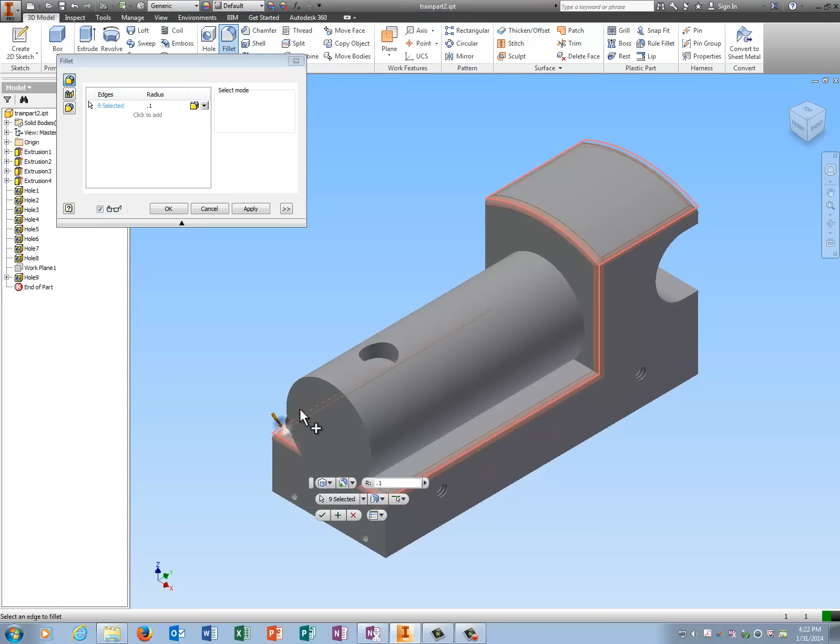So I'm going to just start clicking on all of the edges. And guys, this is like Pokemon, you gotta catch them all. So get this front, get this part here, get these little pieces here.

Where the cylinder touches the bottom. Don't forget this little guy.

Now if you miss one, can you go back and add it? It's just easier to make another fillet, like click on fillet. Get these guys, this little guy.

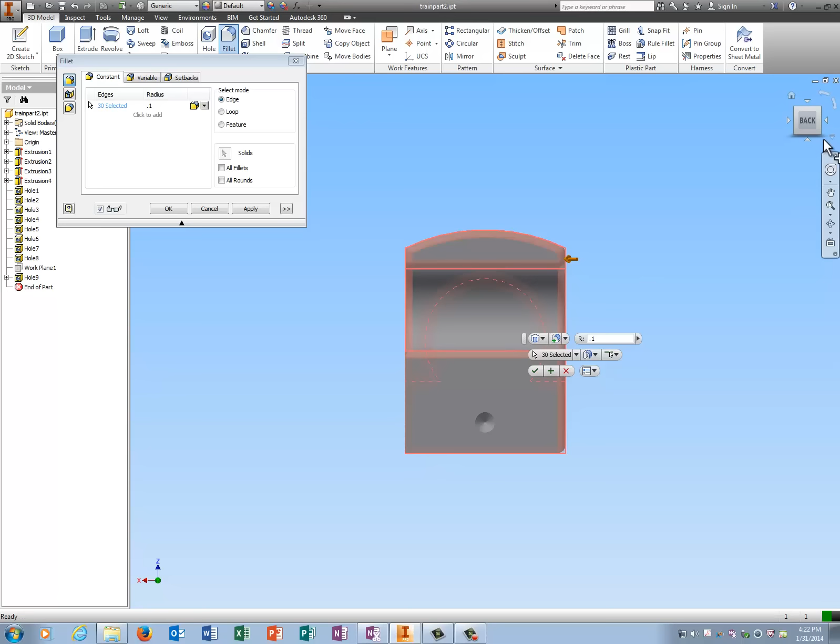Okay, did I get all of those? Making sure I got all of them. Oh, I missed that edge. Okay, that should be them all.

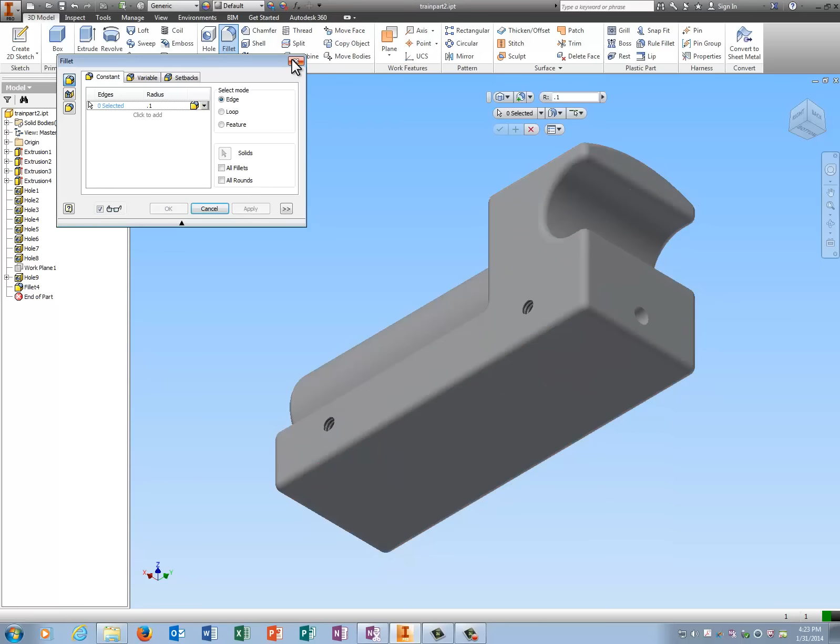So then I hit apply, and now you can see my train is nice and smooth. Give it one more look over. Oh, I missed this guy, so I better go back and add him. Click fillet, click what you need to add, tell it apply.

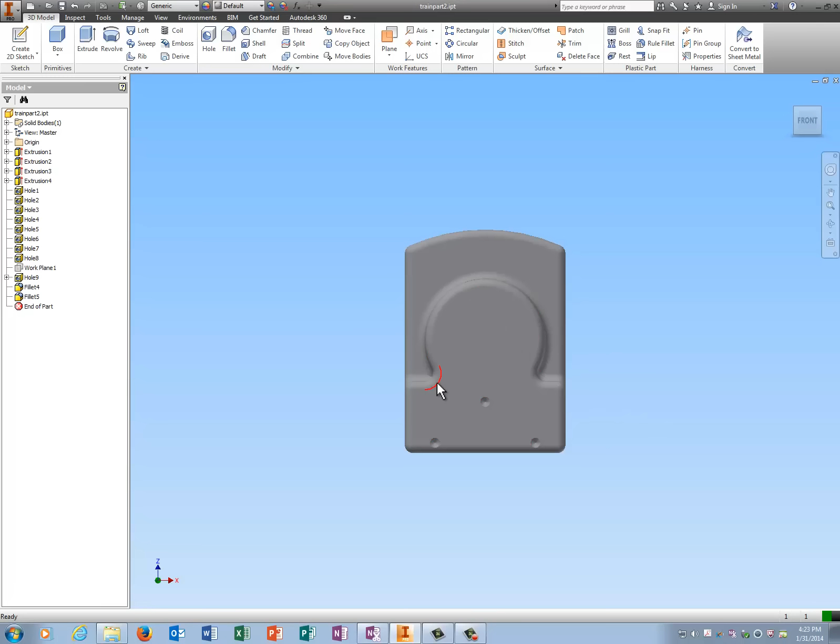Okay, look at the front of your train and make sure this curve bows out. If you selected it in a certain way and it really has no rhyme or reason to it, sometimes it'll bow out this way instead of in, and you'll just need to take the fillet off and go back and fix it.

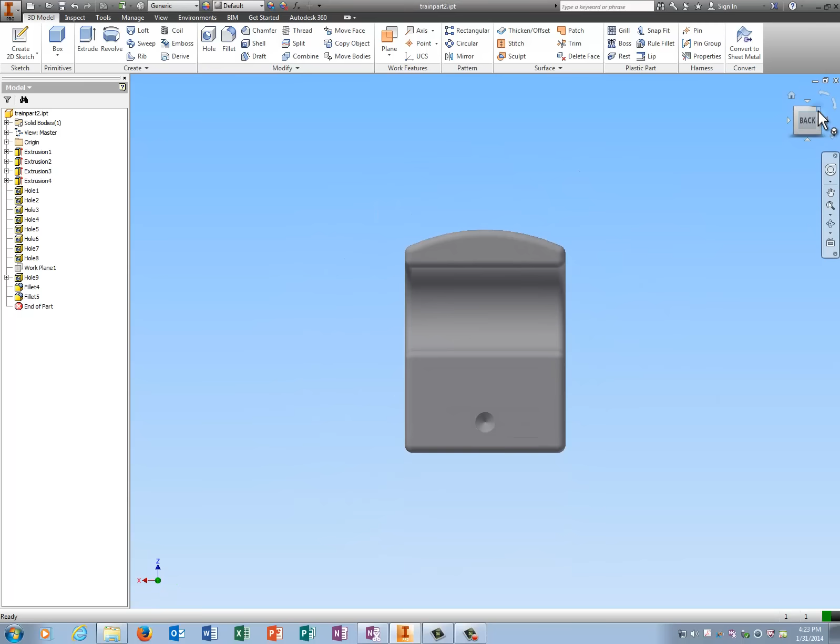Check the back. The back looks good. Okay, time to make the train look pretty. You guys know that you can change the color of the entire thing by coming up here to default. But one thing you can do that looks really good is if you change the colors by extrusion.

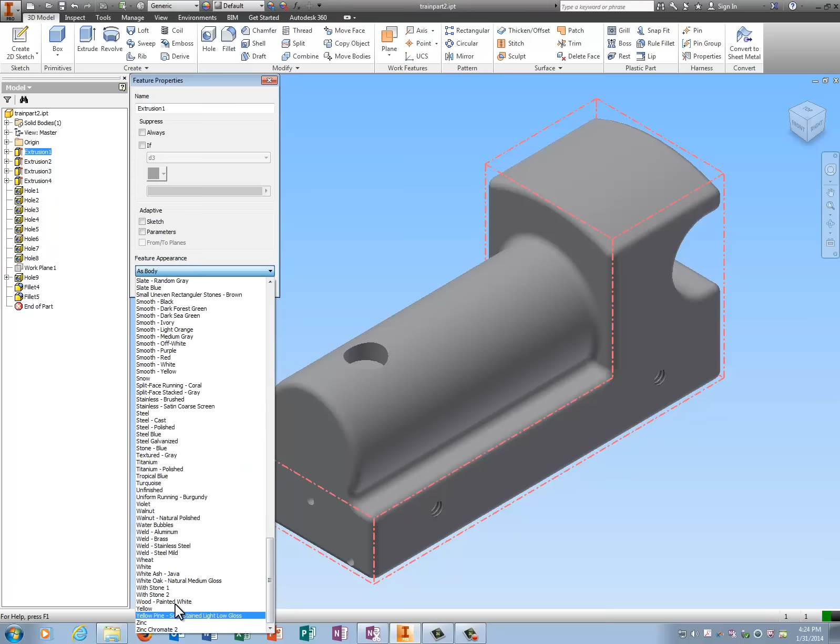So I'm going to right click on extrusion 1, go to properties, and I'm going to make a Clemson Tiger train because what better train is there? And I'm going to look for, well, they don't have purple, so we'll do violet for extrusion 1.

And now notice that it changes that. Notice also that it doesn't do the fillets. That can be really cool because then you can make the fillets whatever color you want them.

Extrusion 2, properties, I'll make this one orange. I'm going to make hole 9, which is this thing here, I'm going to make that black.

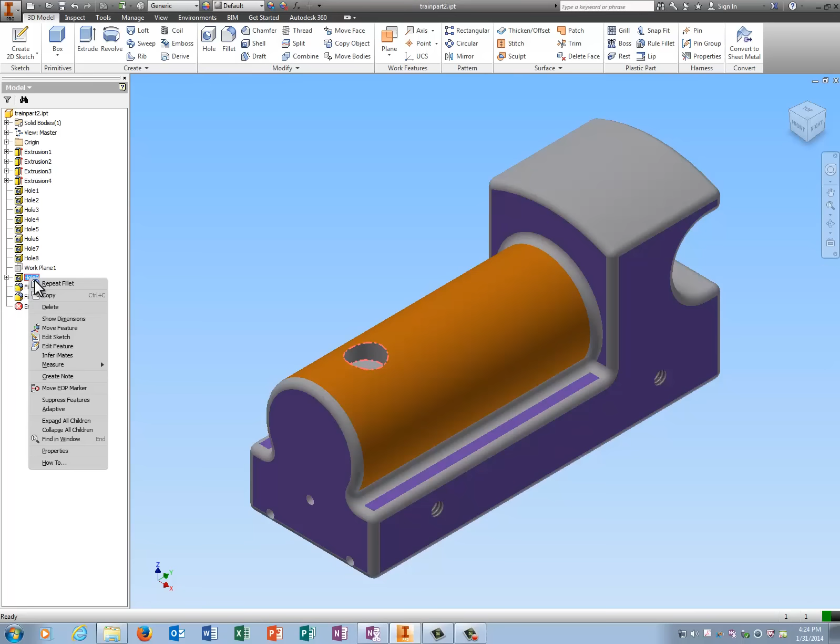Okay, this piece here, which is extrusion, see when I roll my mouse over it, it highlights. That's how you can tell what they are. I'm going to change this guy to, I'll make him purple.

Or violet. Okay, I'm going to make the fillets white.

Okay, so it comes out pretty cool, and since I messed up my fillets, I have 2 fillets, so I have to go back and hit escape.

There we go, properties, make it white. No, not white ash, just white. Okay, there you go. So, that's a very basic colored train.

You can make them whatever color you want. I am going to go ahead and show you how to put a decal on it.

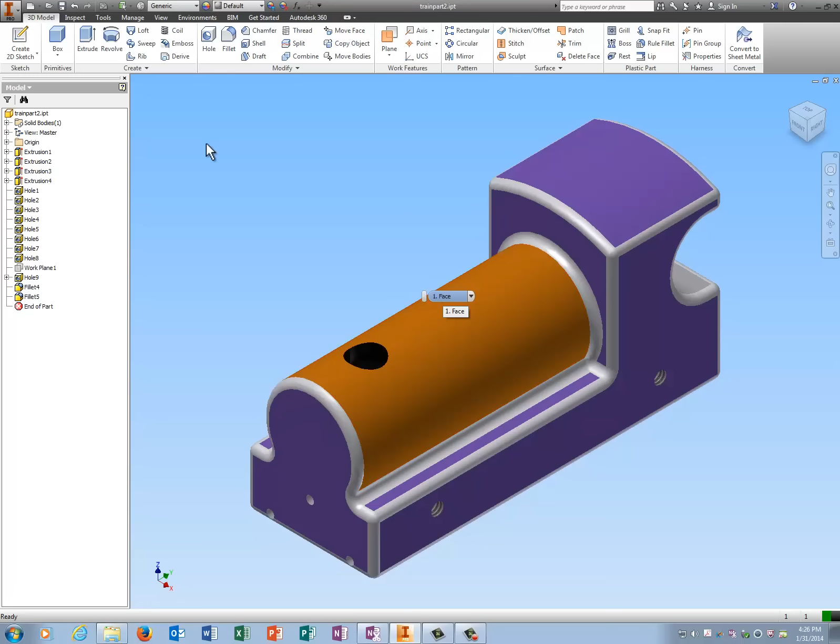You can put a decal on a flat surface or you can put a decal on a work plane and make it wrap to the surface. I'll do both for you. So the way to do a simple decal is to click on Create 2D Sketch and put it on the surface you want.

Now what's really important is before you try and do this, whatever picture you're going to put on your train, you have to save it to the same file folder that you have the train saved in. So it should be saved in your train folder on your desktop.

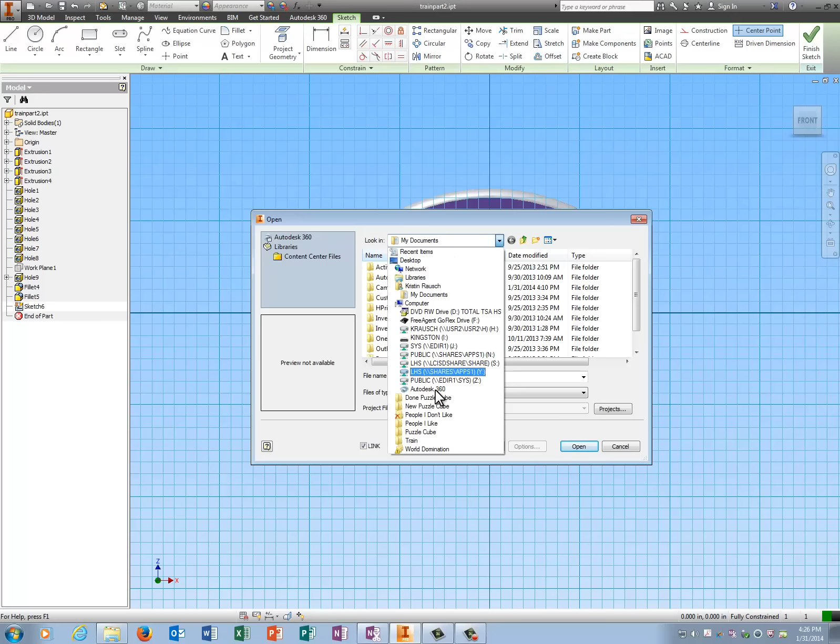I'm going to click Image, navigate to my train folder, and there is the tiger paw. I'm going to open it up.

And guys, this thing doesn't work like Photoshop. It's not easy to manipulate, so if you're trying to resize it, it's kind of yucky. I'm going to finish the sketch.

Now you guys see I have this unconsumed sketch over here that's just hanging out in the middle of nowhere. What I have to do is use a command called Decal to get that picture to stick, because it looks like it's sitting there right now, but it's really not.

So click Create, Decal, pick the picture, pick the face you want it on, tell it OK. So now my picture has turned into a decal and it's stuck to my train.

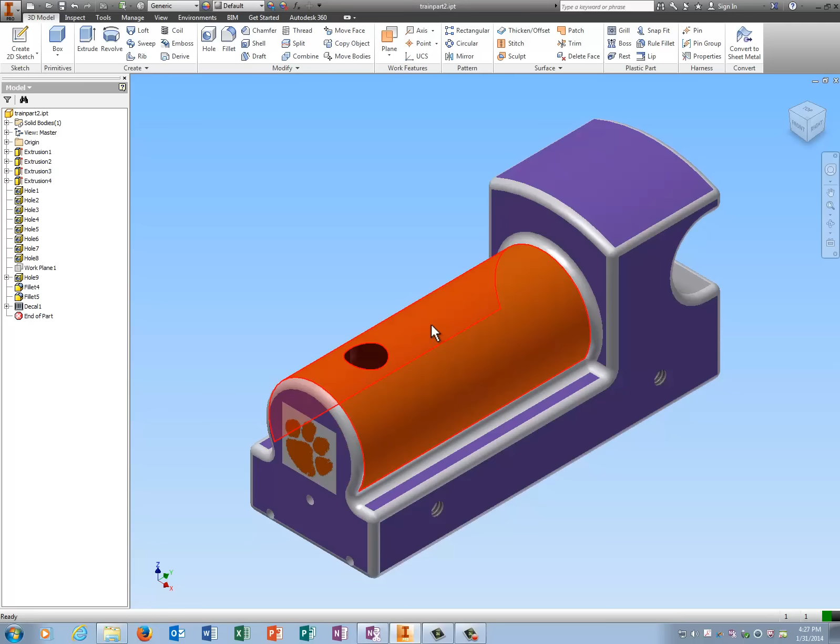Can I put one on the work plane and wrap it around? Yeah, I can try that. So I'm going to go work plane. I'm going to turn on visibility on this guy rather than making another work plane.

Okay, I'm going to put a sketch on him. And I'm going to do image, pick my tiger paw again, put it right there, finish sketch.

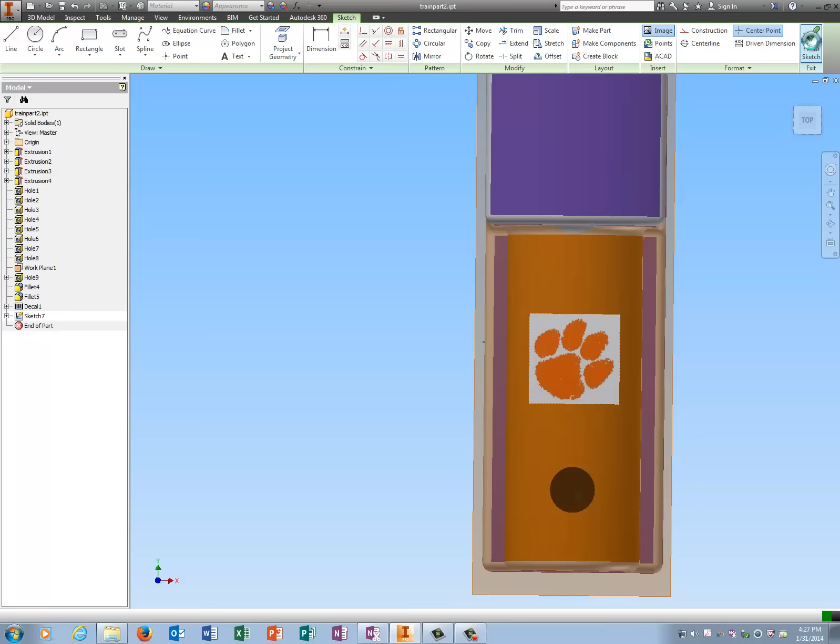I'm going to go back to decal, which is under create, pick this, pick the surface, and I'm going to tell it wrap to face. And see, now it sticks it to the top of the train, which is pretty cool.

Then I'm going to turn my work plane off again. Okay, so now I have a train with 2 tiger paws on it, which makes it doubly awesome.

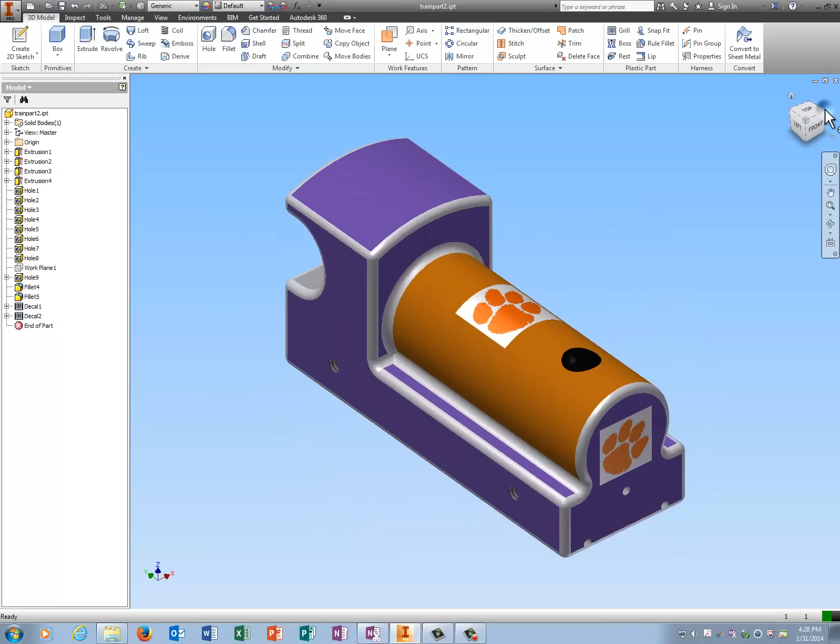You guys can put whatever you want on your train as long as it's school friendly and looks good to me. Just no gray trains, because gray trains are boring and they make me sad.